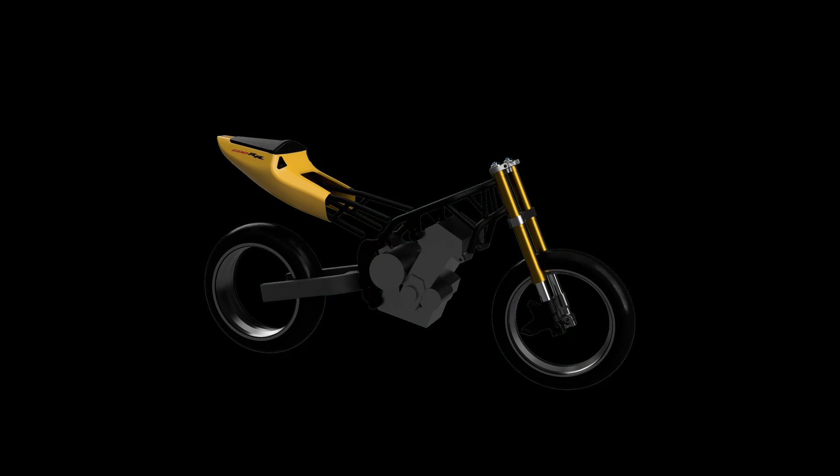In the previous video I shared a combination of using surface forming with parametric surface modeling to model a rear tailpiece, finishing it off with some decals.

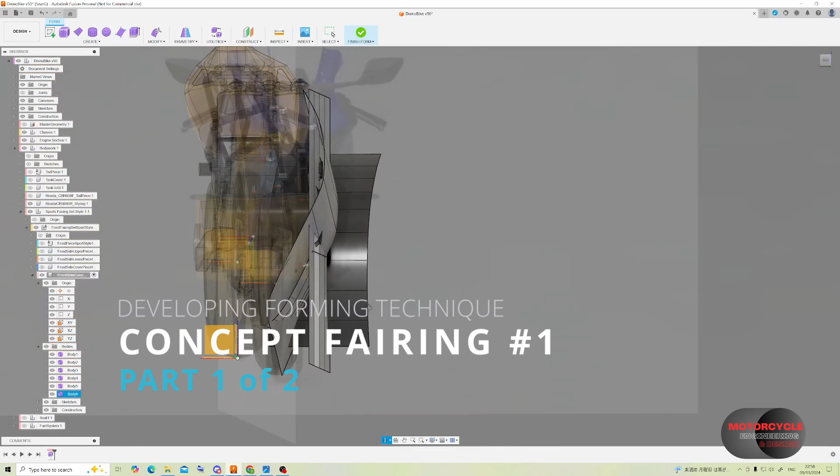It's always useful to have a reference image, not that we're going to be copying the design, but we're just going to use it for reference for scale and size, and it can also be a useful reference for the mounting points. So this sketch is the concept for my sports fairing.

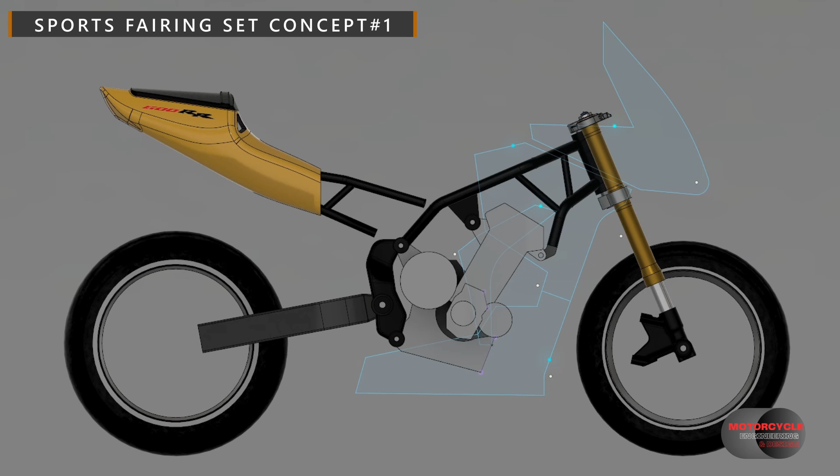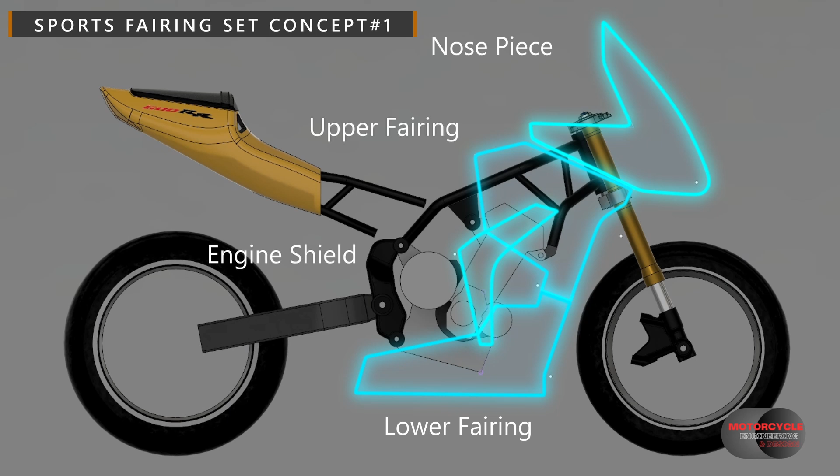Of course it's comprised of a nose piece, upper and lower fairing, and then I have an extra piece over the top which I'm just going to call the engine shield. In this design I'll revise it a little bit just to get the crash bungs to fit through the fairings. Now I am never completely happy with things, so this design is likely to change.

If you're new to surface forming and you are planning to use it for a project, I do recommend just spending some time playing around with a throwaway model.

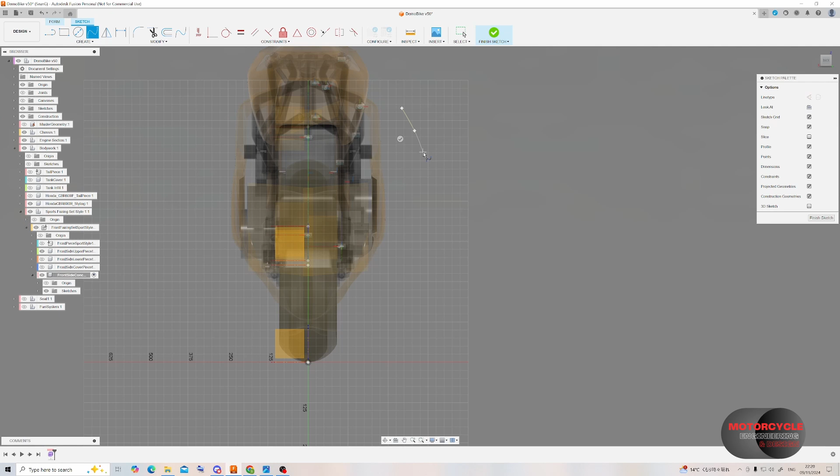Moving on to the actual modeling, I start with the right hand fairing piece. To keep a nice surface I use the fit point spline, and then extrude that surface the full length of the bike. Using the transform tool we can then move that around into position, and also add some more interesting angles and lines by rotating it.

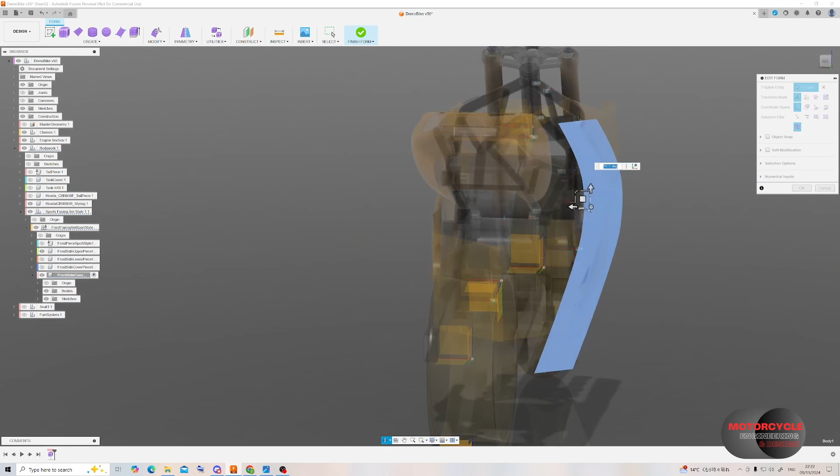Whilst it doesn't look like much now, when we start to merge this with other surfaces, the lines and the angles will start to come together. Once we've got a position and rotation we like, maybe we need to adjust the lower and top edges, so we can just drag those again with the transform tool.

As the bodywork gets tighter and tighter into the frame and the engine, we end up getting much closer to various components that we need to then make clearances for. One very common example would be the engine casing.

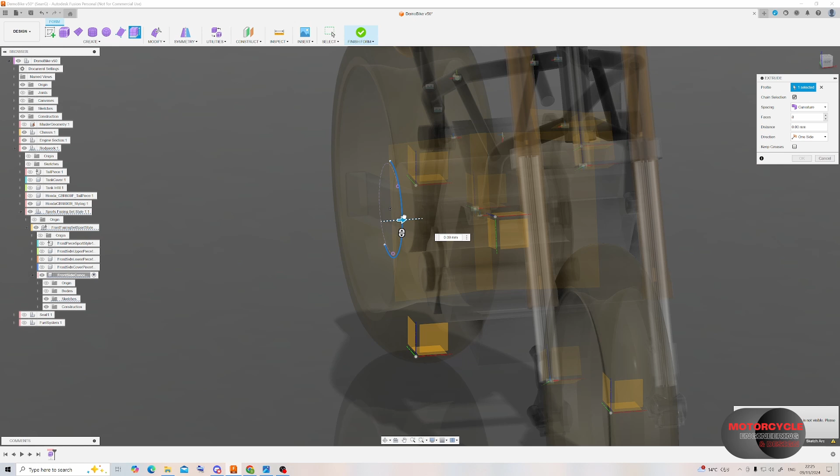So here we add a surround for the engine casing, starting the sketch with a center point arc. Then we can extrude a surface from that, making sure it goes through the other surfaces we've generated, and also add a taper to give a little bit of extra shape to this profile.

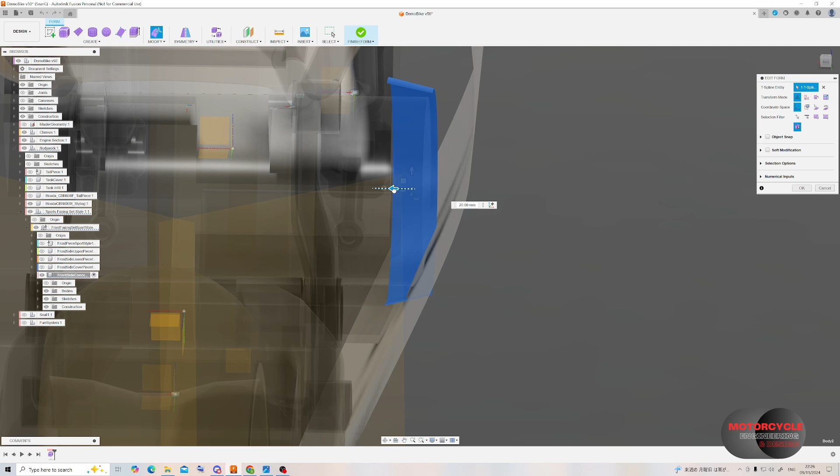Then I come in again using the move feature to move it into a more ideal location. Creating a new offset plane, we repeat the same process to create another surround around this mounting point here.

In this case we make the taper a lot larger, and we start playing around with the surface forming tools to make the geometry a little bit more interesting so that it merges in a bit nicer with the fairings.

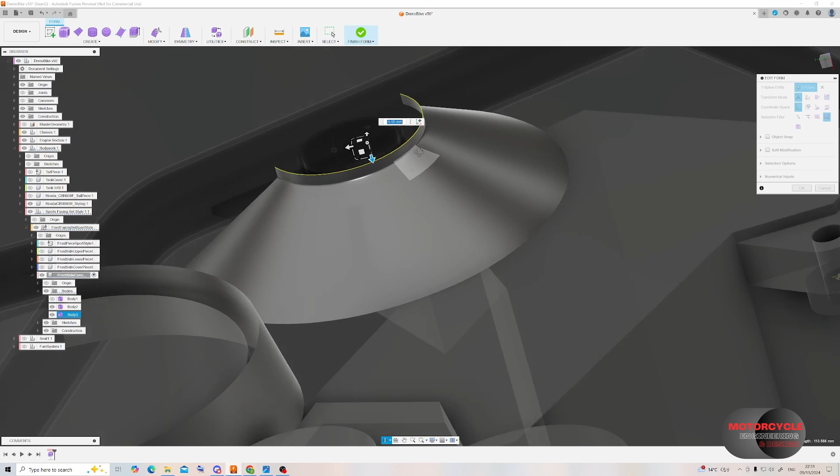So in order to merge each of these features nicely into the fairings, we'll need to keep track of the number of points or segments that we have around each of these profiles.

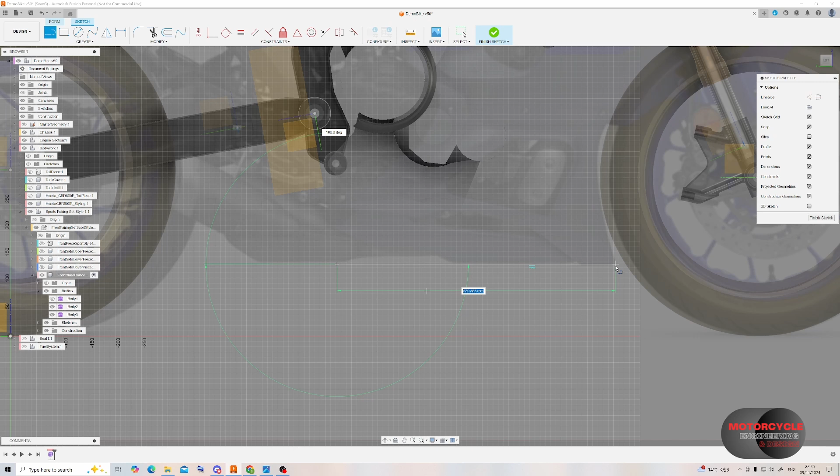Now I want to start working on the main fairing, which is going to merge into that rounded surface we created earlier. I'm going to start from the bottom, extruding out.

I like to use the crease tool to prevent certain surfaces from being warped by other modifications we make surrounding it. In this case I'm dragging the outer edges up, and I don't want to ruin this flat surface on the bottom.

We can also try rotating some of these lines and see if we can create some more interesting geometry. At this point I want a few more surfaces, and I want them to be a bit higher up, so I can drag this surface up using Alt to create some extra surfaces.

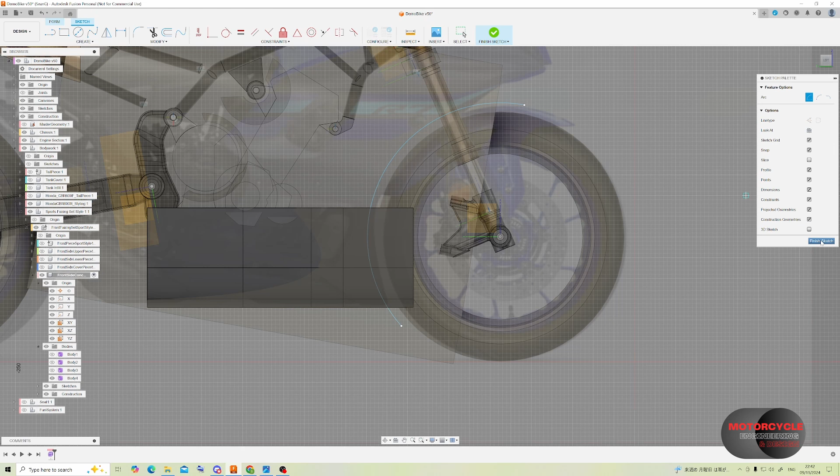Then we can use the move tool to morph these surfaces, the points and the edges, into the kind of profile that we want. Like I did for the engine casing, I used the center point arc around the wheel to carve out this front edge of the fairing. For now we'll just extrude that as a surface, and we'll use it later when we trim these surfaces down to a more final version.

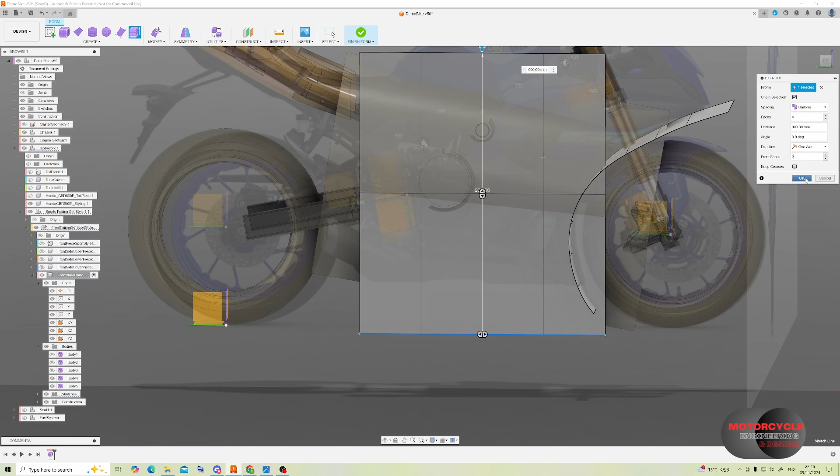Here we can also tweak it to fit our side profile. Now I do want a flat surface as well, so I'm just going to extrude a flat line vertically. And now here is my collection of surfaces that I'll be using to form my first draft.

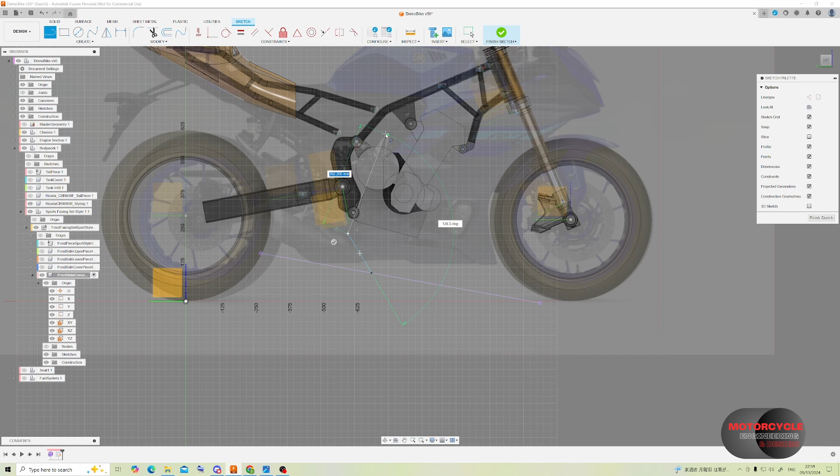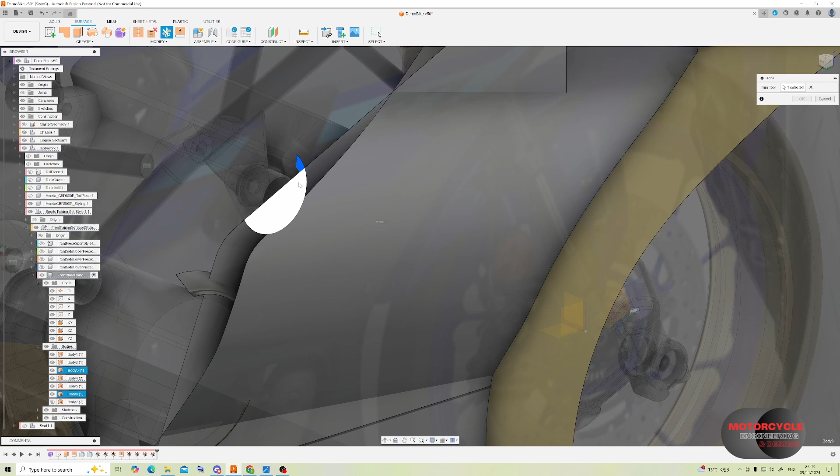Just need one more surface, which is the side profile of the fairings. Now with everything ready, we start trimming down our surfaces. Sometimes we have to extend our surfaces so we can complete our trims nicely. In other cases, if we try to merge this geometry in its current state, we'll get strange geometry once we try to round them. So we'll typically overextend them, merge them together, add the rounds, and then trim the profile away after.

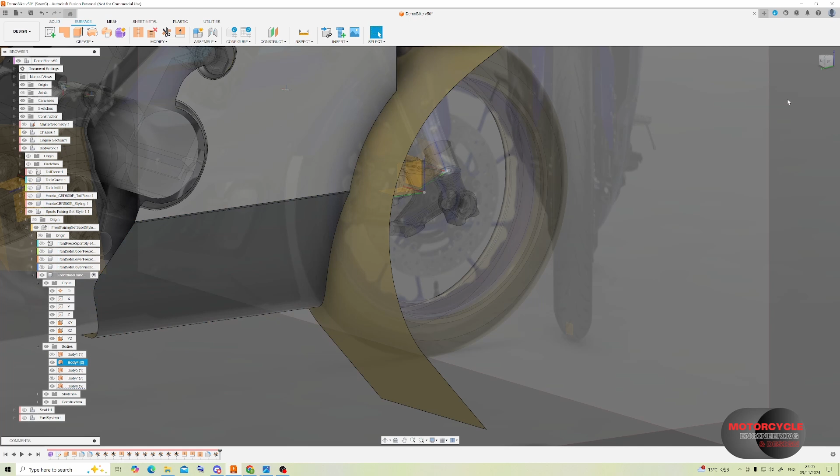So here we come to where we merge the lower surface and the flat surface. Currently I think this looks very dull and boring, but we can select the top edge here and then rotate that edge to create more interesting lines.

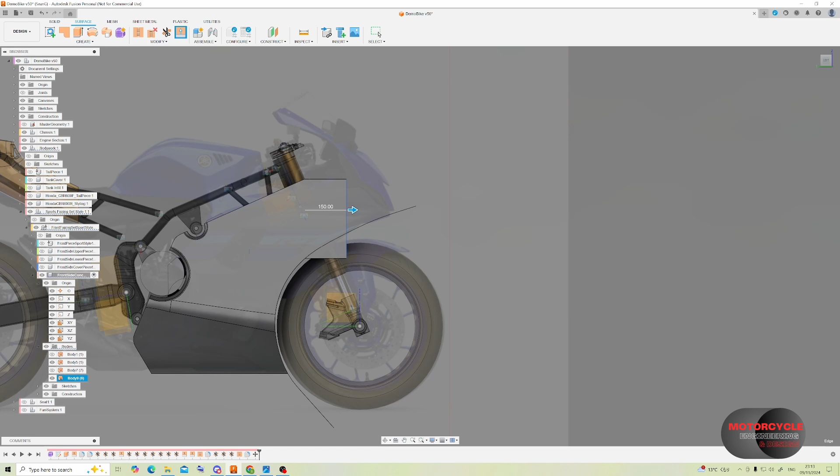I also want to add a little bit more shape to this upper edge here, so I extend it out and then use a curved sketch profile to trim it back again. Once that's trimmed, I create a plane at the end of the curve, and then sketch a curved profile to sweep along this edge.

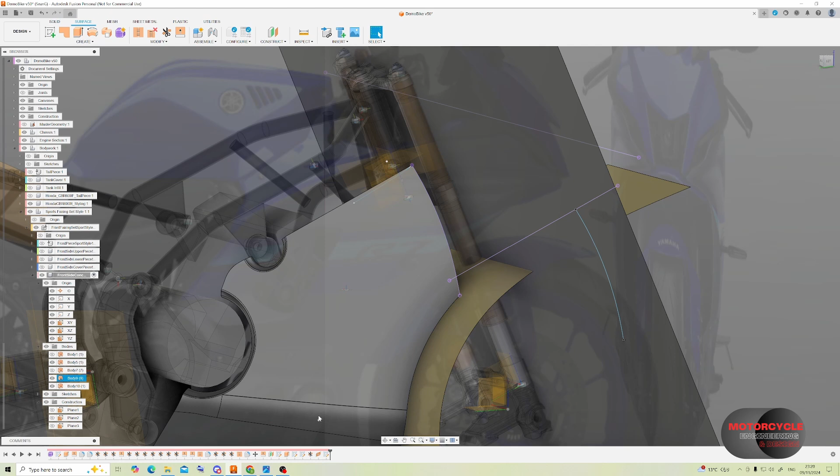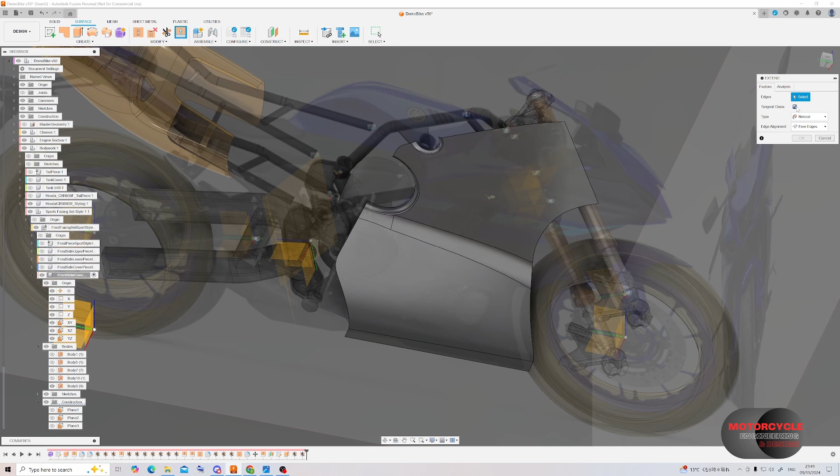Now we can come back to our profile and start trimming these surfaces back again. I want to extend the bottom geometry here, so I deselect the tangent chains so I can just select the surfaces or edges that I want, and then extend those out.

I then use a sketch profile to trace out the shape that I want, and then I'll extrude that through as a surface to trim it away.

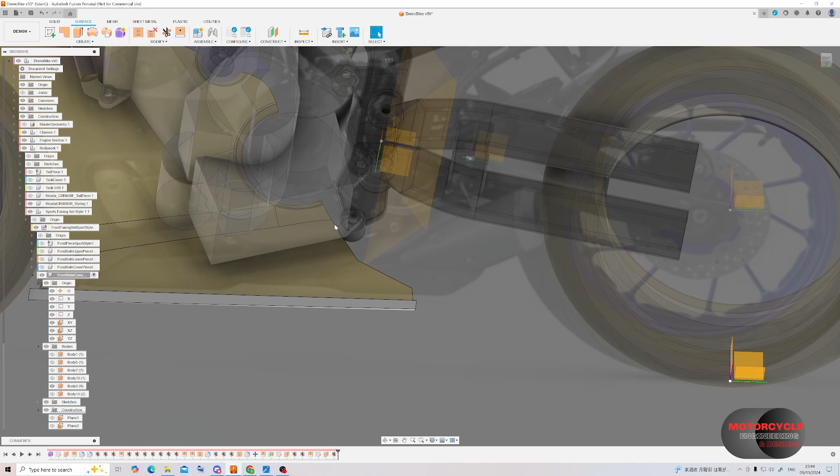So just to build the surfaces just behind the front wheel, I start with making an offset of our external surface. This one's going to trim away the front surface, as you can see here, which will extend through the surface so we can trim it away nicely.

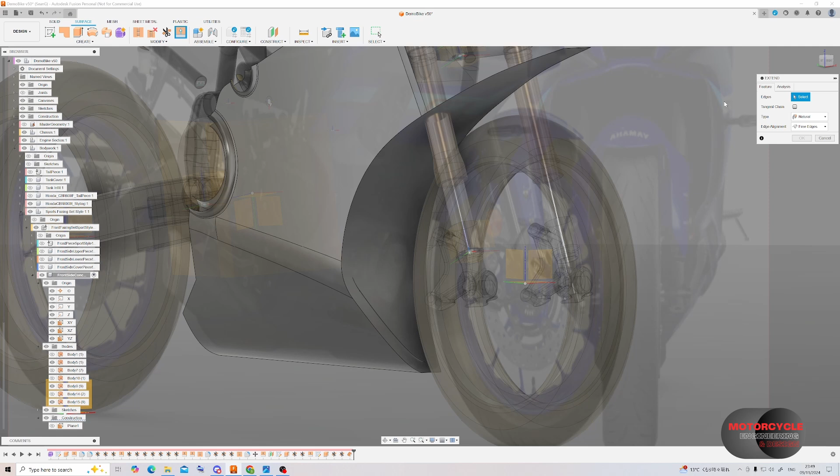There'll be a few extra bits of tidying up around this area, including some rounds just to tidy up the look.

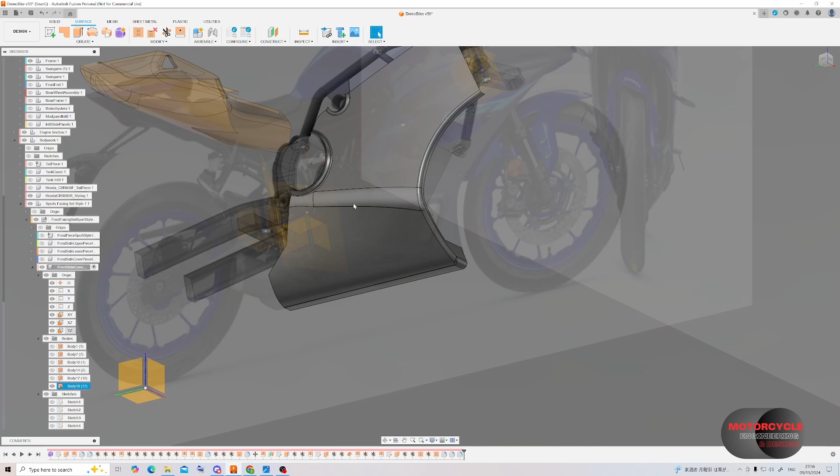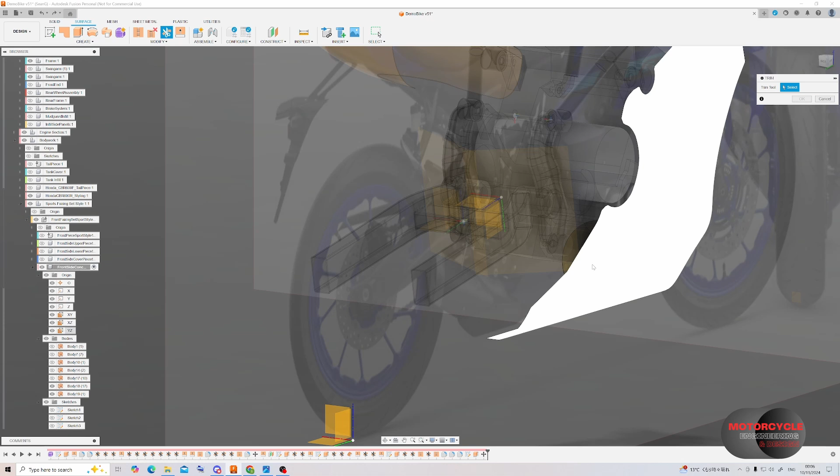So I want to add some additional features, and just to show, we can do this by creating a shape externally and then moving it into a position we're happy with. In this case, I've extruded a cylinder with a draft, then moved that into position, rotated it, and now I'm going to trim the inside of this cylinder away using the surface of the fairing.

Now in order to merge this shape into the fairing, I actually need to cut away the same profile. So using a sketch on an offset plane, I project the profile of this feature, which gives us a sketch profile that we can then extrude and cut away from the fairing.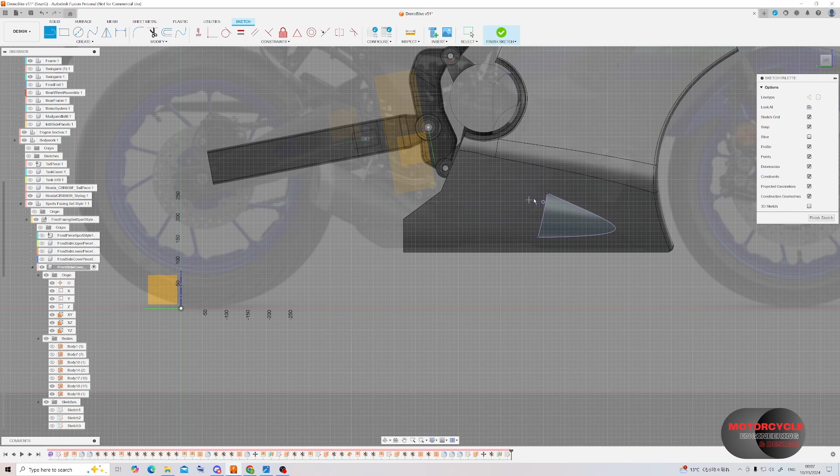Now I want to cut away a little bit more geometry, and just to show, if we create geometry like this, we have enough material to then add rounds, but in this example I haven't actually done that.

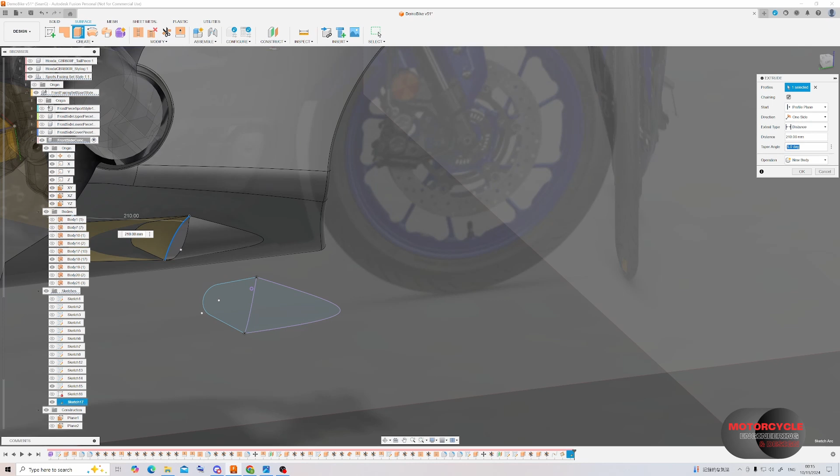Here I create a plane on 3 points so that I can add a new sketch profile, a new curve, which I'm then going to extrude in the opposite direction with a draft or taper, and then use that to trim and merge into the fairing as well.

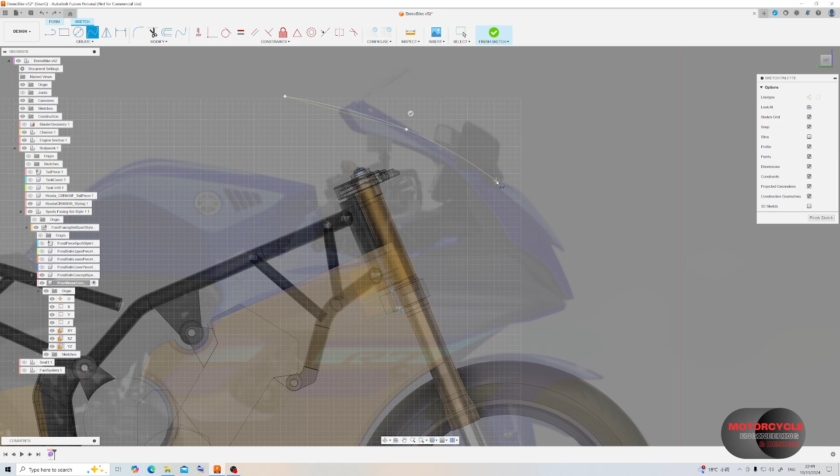So we start with using the fit point spline to create some nice surfaces. In the fit point spline we can drag the points after placing them, but we can also select those points and then manipulate the handles to affect the curvature.

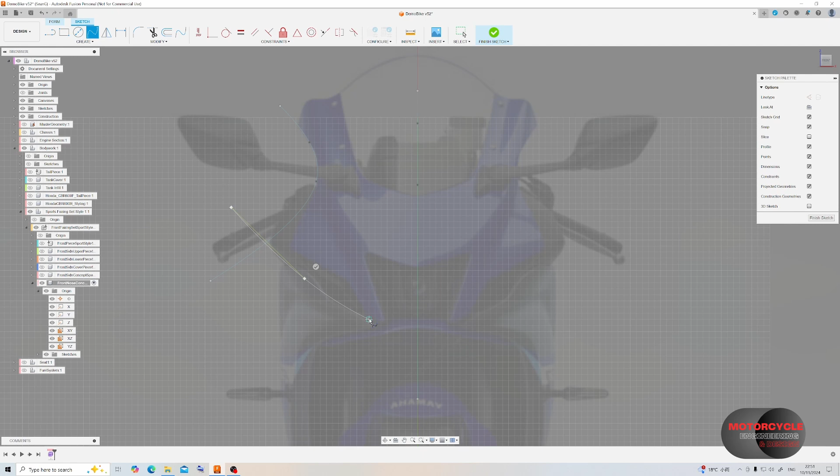Then create a series of additional curves which are going to be used for reference when using the forming tool. These curves are currently made in a 2D plane and I can then drag them into position, but ideally you would use the 3D sketch for this. And you could also use those 3D sketches, those splines, to bridge between each other to create the geometry.

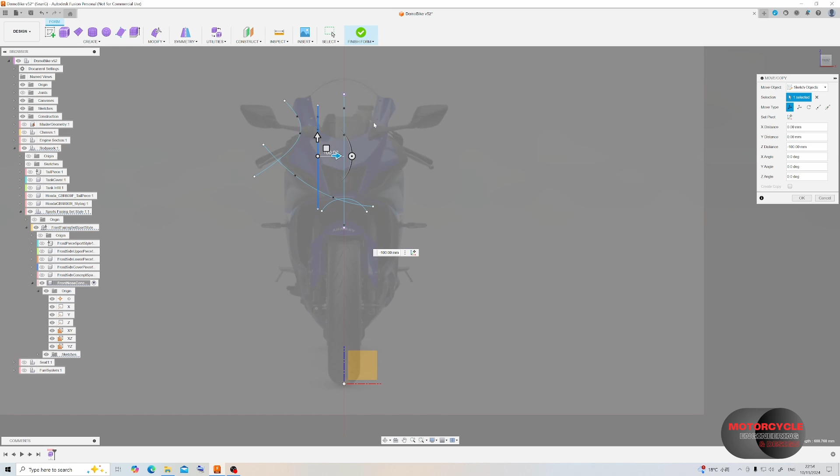So here I'm just using the move feature to move these lines to be roughly in line with what I've used as reference when tracing them.

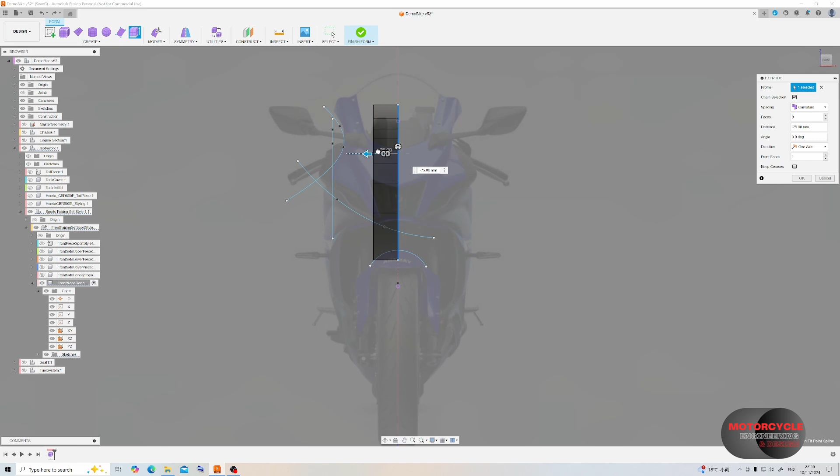So I start with extruding a surface from this line on the center plane. And if you want, we could do that with all of the splines that we've created here.

So from now I'll be trying to bring some shape to this nose piece, and I'll start with just rotating some of these lines, adding in new lines, and seeing how I can make it fit amongst the profile that we've created with the other curves.

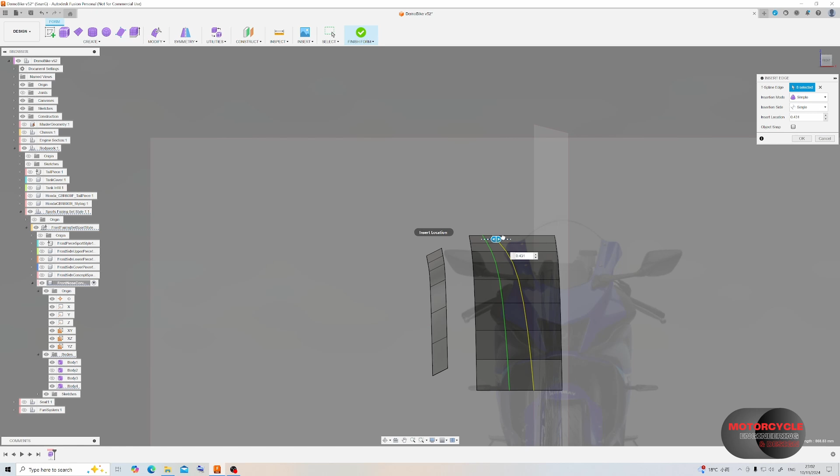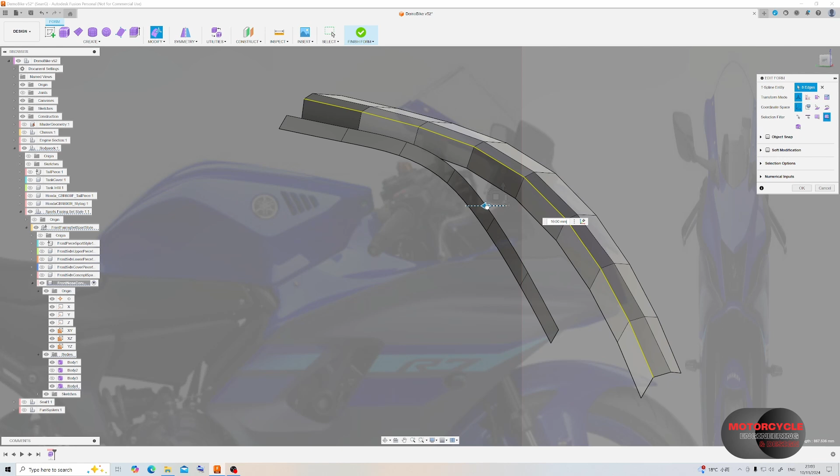So I feel like this is where I really started to learn how best to use surface forming. It's also where I started to enjoy the process more. So I found that with surface forming, it takes some time to get used to it, but it's really beneficial to play around with it.

Making the mistakes and then learning how to fix them, I think that's what makes you better with surface forming. And I'd say I've definitely learned from my mistakes, and I've learned some better methods of using surface forming so that I can create the shapes that I actually want to make.

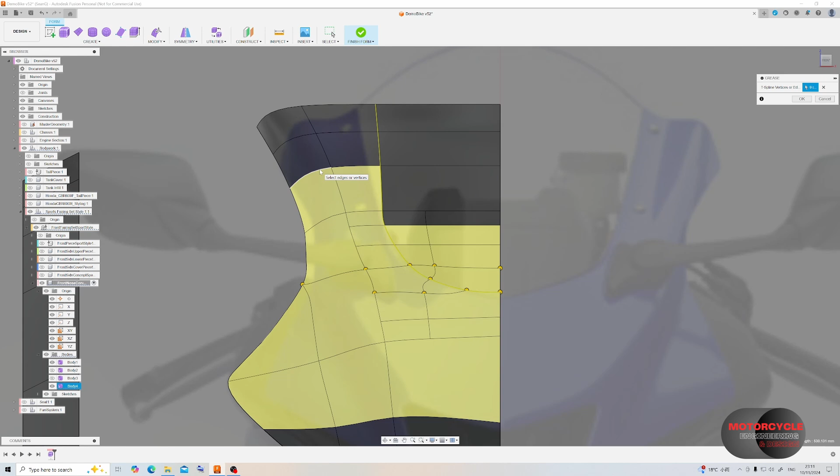As you can see here, using the crease feature to strengthen this curve so that we can delete these surfaces where the windshield would be. But just to improve the quality of this edge, we use the smooth feature on these surfaces to get a nice smooth line.

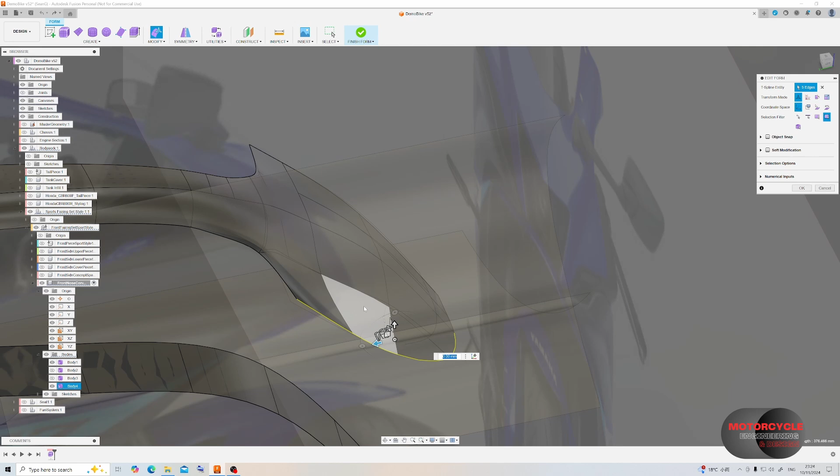Using these handles to morph the profile at the edge. And then here using the transform tool to create new surfaces and pull them around until we match the shape that we're looking for.

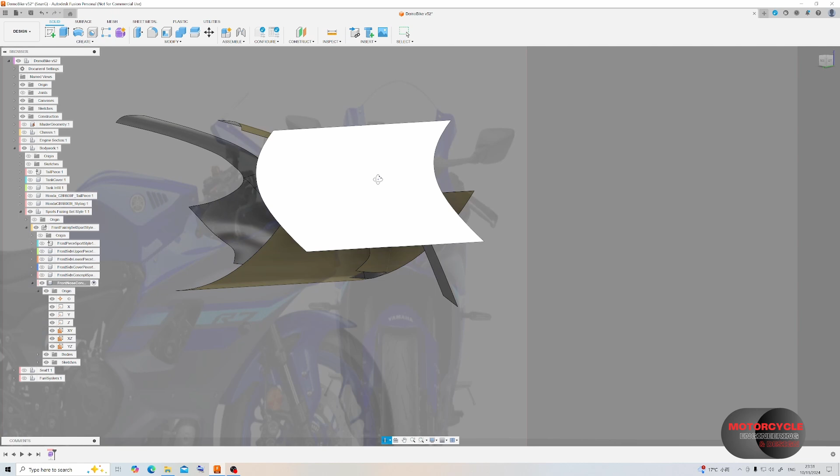So it's around this point that I'm happiest with this nose piece. But there's quite a few features missing, and one of the important ones would be the windshield.

So here I just start to add the geometry with a projected sketch from a plane that's positioned above the bike. I project that on the vertical axis so that the sketch fits nicely onto the surface that we created here.

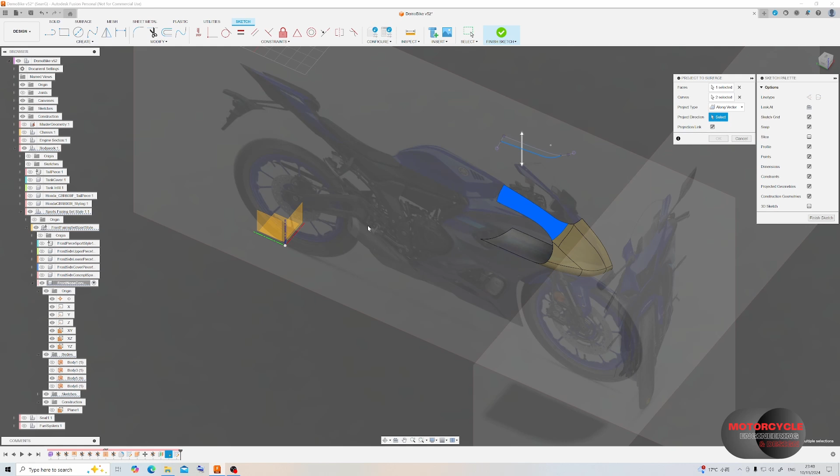We use this surface to drive a sweep, which will be the mounting surface for the windshield. And then just to trim this back in line with the profile here, we then extrude that previous curve back through this surface and trim it away.

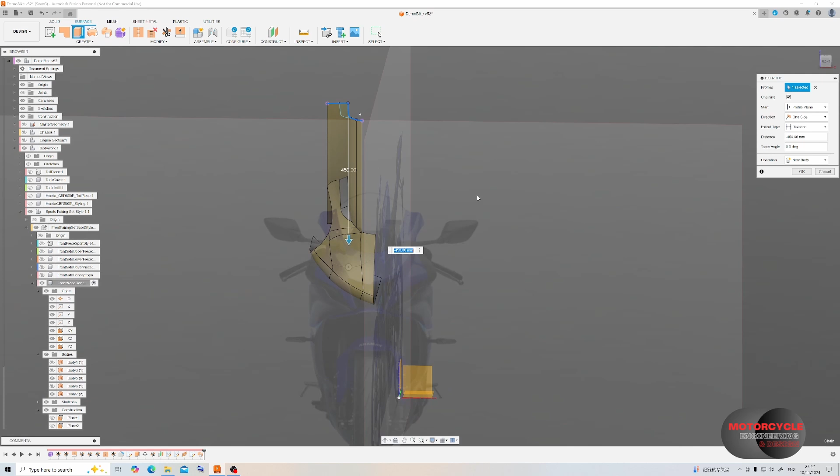And since I merged the lower surface in, we've ended up with a much sharper, much harsher lower surface, which I don't really like. I would definitely change this in a later design.

Now at this point I see that it's kind of missing some geometry. I need to bring something in that's going to connect the nose to the main fairing.

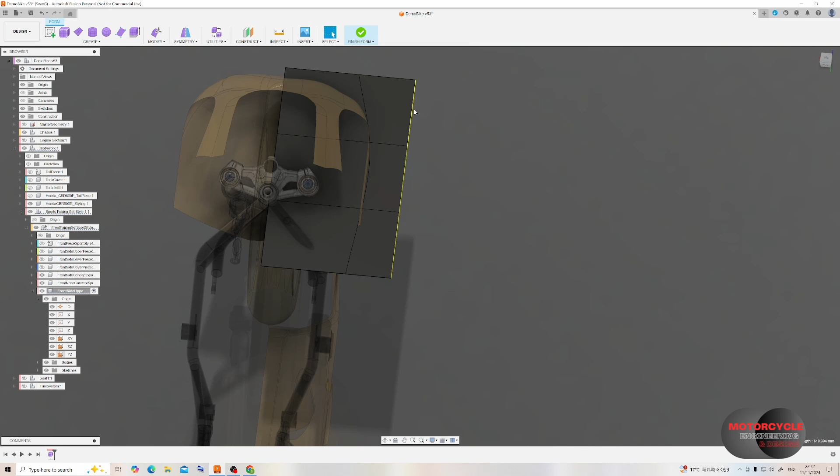So here I extrude the surface with 3 sections so that we have some ability to manipulate the surface later on. And I use the insert point to create a curve, trying to match the form of the nose piece.

Then I drag a new surface down so that I can then delete this top edge.

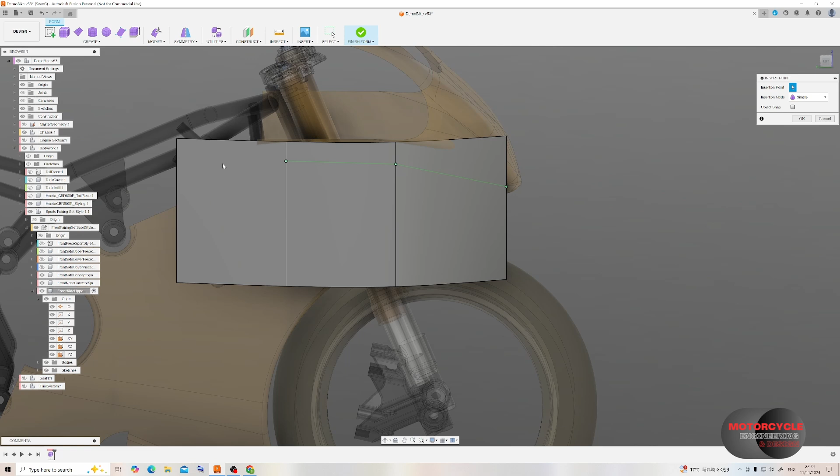Now with this surface I then use the transform tool to move it roughly into shape, and then you start adding some new curves to match the profile from the side, with some final adjustments just to make it line up a little bit better.

Deleting that top edge, now we have it fitting fairly nicely to the fairings. Then I change back into box mode so that I can see the points, and I start adjusting this to try and make it a nicer profile and modify it into something a bit more interesting.

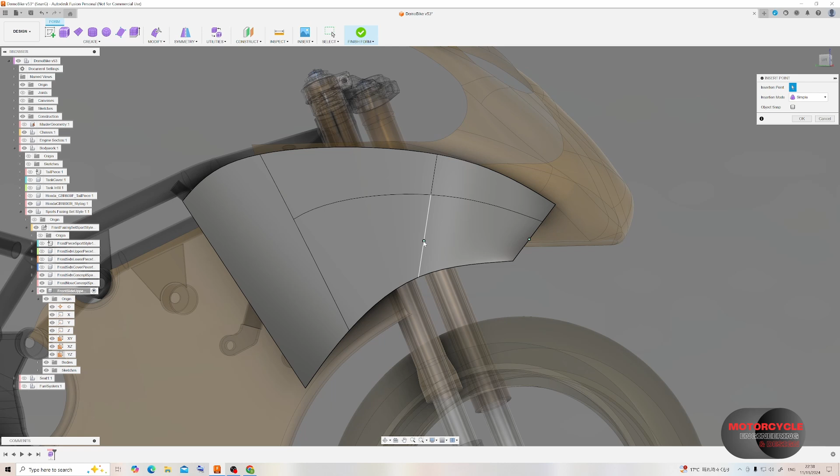So for that I needed to create some extra surfaces, some extra points, using the subdivision and then inserting points like this. I can then select these surfaces and drag them in with the transform tool to make this slightly more interesting geometry. But I'm not going to leave it open like this, so I need to morph and warp this lower edge until it's more enclosed.

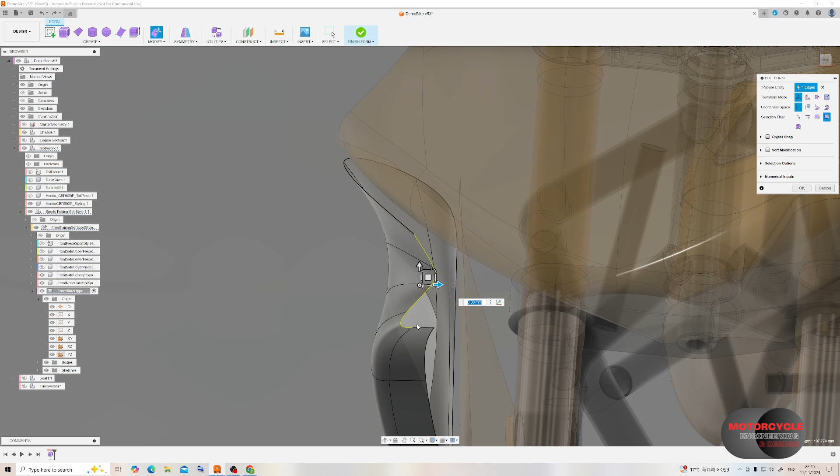I also created this flat piece on the bottom of the fairing, and I created that using the crease and flatten features. This will be for the connection to the middle piece of fairing.

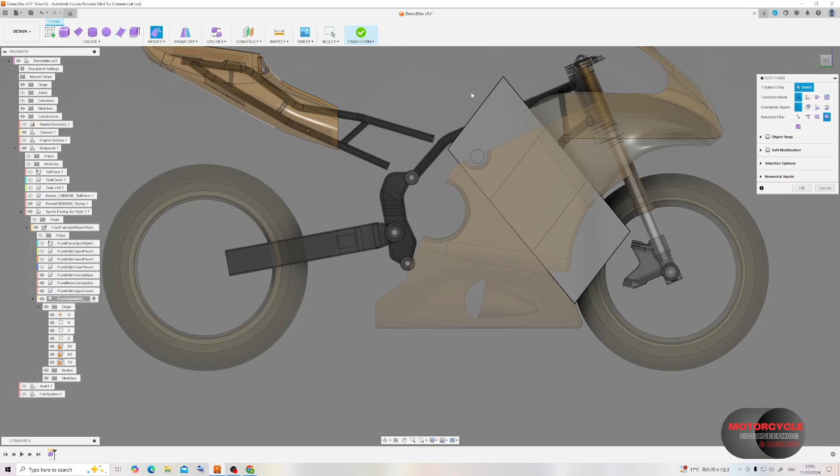I'm still playing with forming, so this part is going to be very experimental, a very crazy shape. This isn't something I'd plan to use, but it's just practice making the shapes and features. I start with a straight surface again, then pull these points around using the transform tool, and add subdivisions so I have more freedom to morph the surface. Then I use the crease to create some sharper lines, and using that with the transform tool I ended up with something like this.

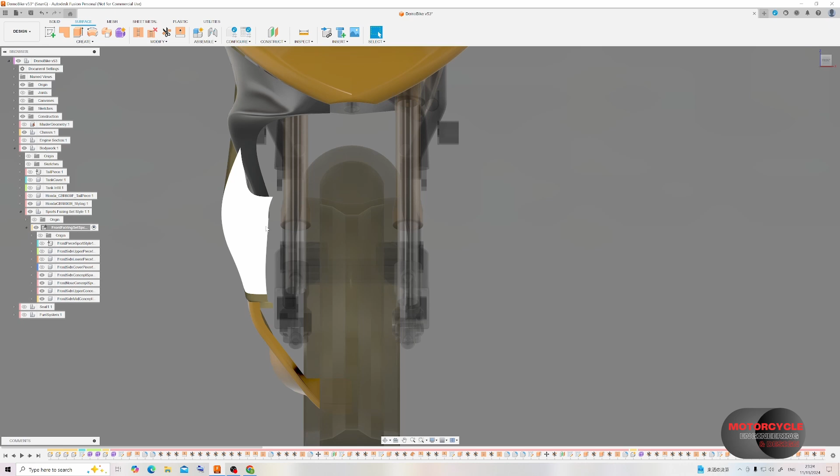Now the inner edge of all these surfaces is very inconsistent, so you can see how you'd want to use one surface to create these parts, even across multiple parts, or make all of this as one piece and then split it later on.

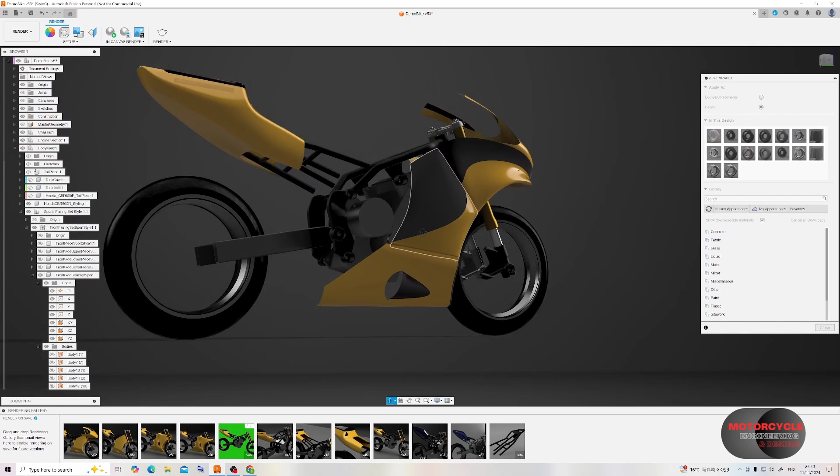So here just playing with the colors, and I realized I've got this strange curve from the top to the middle piece, which I hadn't noticed while I was modeling.

No fairing is complete without a large hole in the middle. In this case it's going to give clearance for the crash bungs, but it's also just a good exercise for future designs.

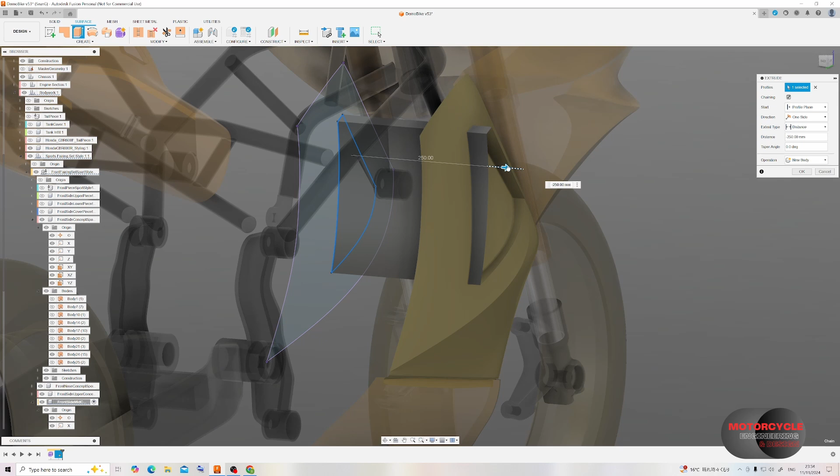Using an offset of the projections of the profile of this surface in a sketch, I then extrude a surface to trim out this hole in the fairing.

Then we can make that a bit more interesting by adding a taper to it.

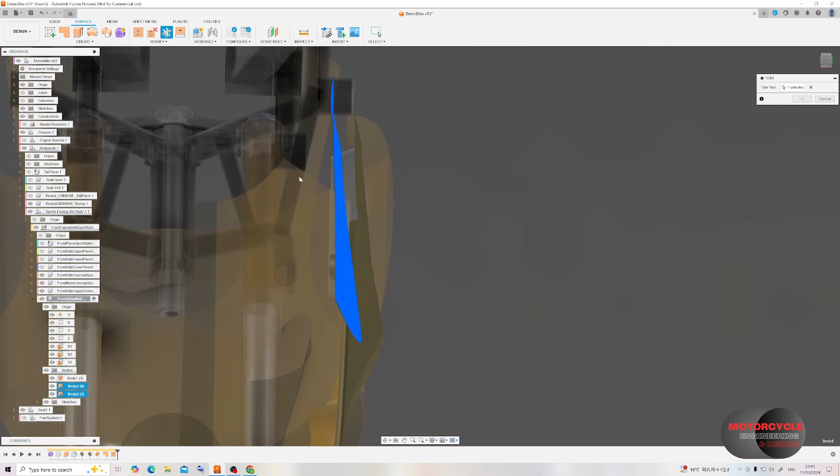To trim that back so it's not too deep, we can use an offset of the external surface and then fill the hole with a patch feature.

From here there are just some minor adjustments to line up the edges of these fairings so they fit a bit more nicely.

I then mirror these parts across the bike as components, and now we have a full set of fairings. Noticing that on the left side, because the engine is asymmetrical, we have a casing bulging through, so the left side will actually have to be modelled separately, or at least modified.

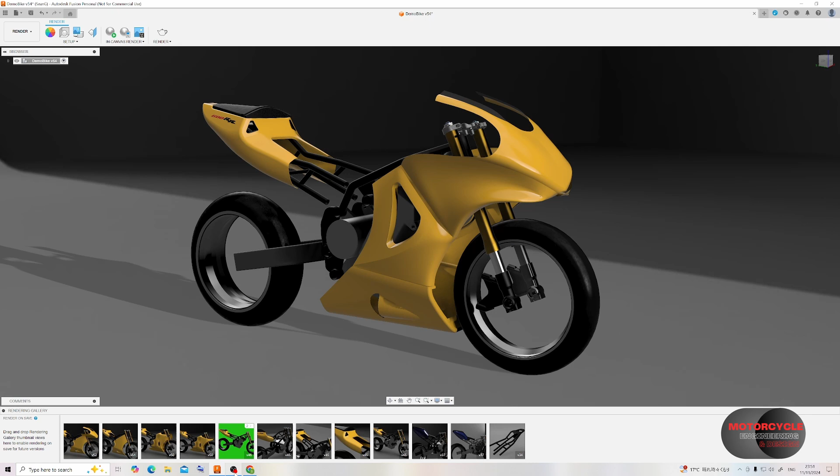This has been a fun exercise, but there are so many components missing from this bike that these fairings don't take into consideration these parts in the design, the packaging, or even the function. So I'll definitely come back and revisit this when I have more components in the cockpit area especially.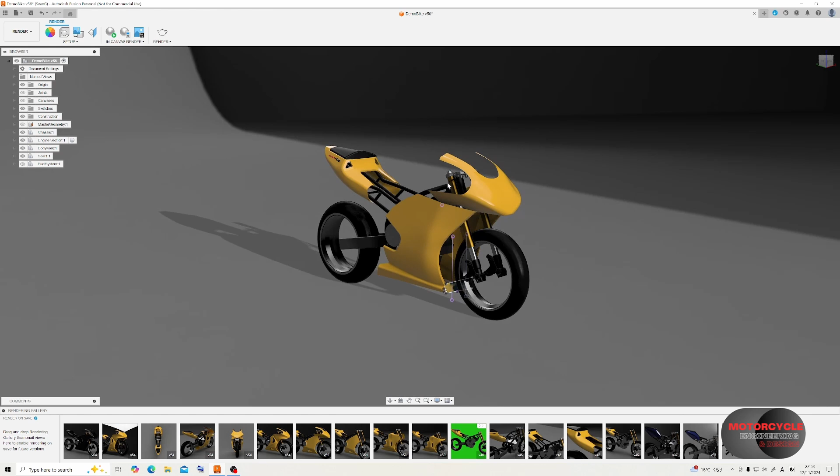You'll see now that I also have some other concepts. This is my second concept, where I tried to focus on making a nicer, smoother surface and then adding in some different features like this lower fairing here.